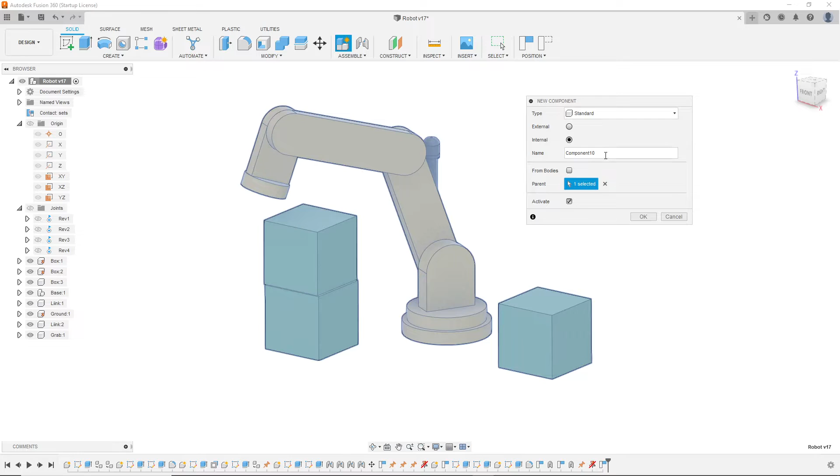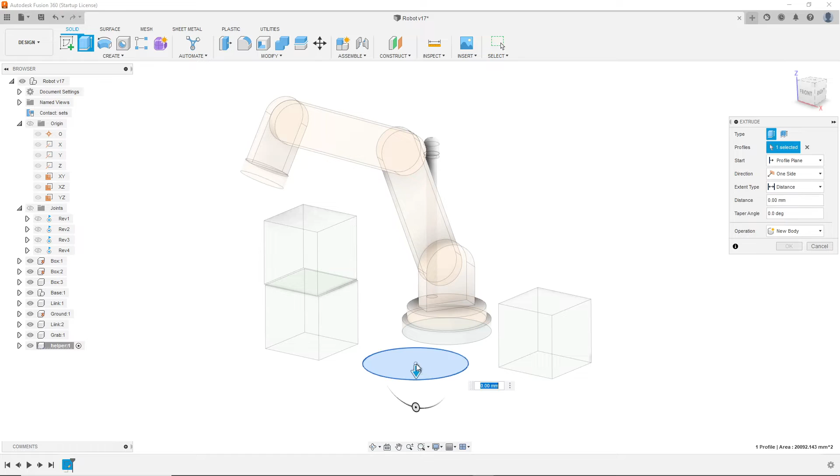So if I right click on the assembly and create a new component, I'll just call this helper, and create a sketch on the base plane. Just draw a circle and we'll extrude that. Okay, so there's our body or component that's been created.

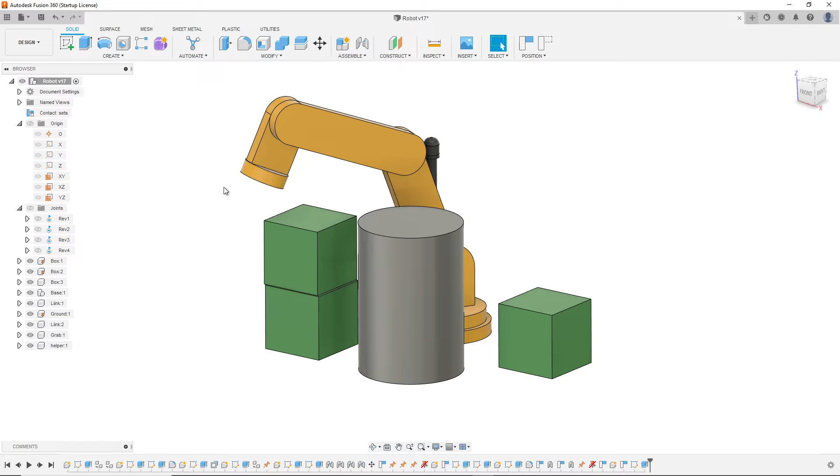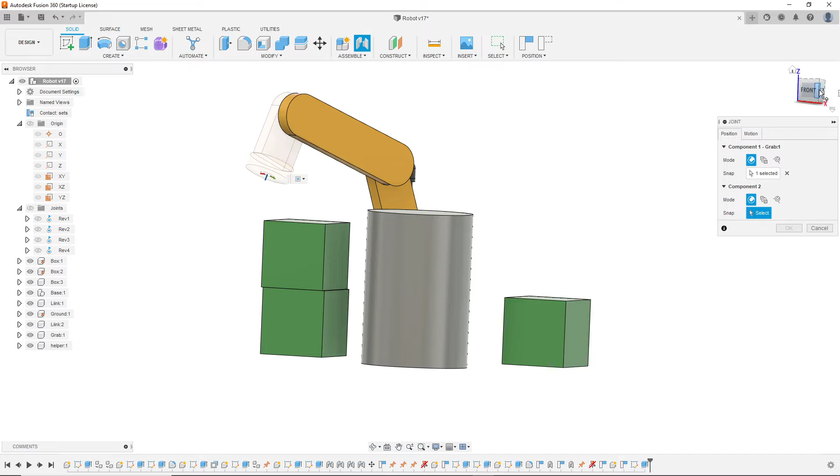If I go back to the assembly, what I can do now is add joints between this helper component and the various components on my assembly to enable me to keep the bottom of this grabber parallel to the ground plane. So if we add a joint, the first joint I want to add is planar, and this is going to be between the bottom of the grabber and the top of the helper solid.

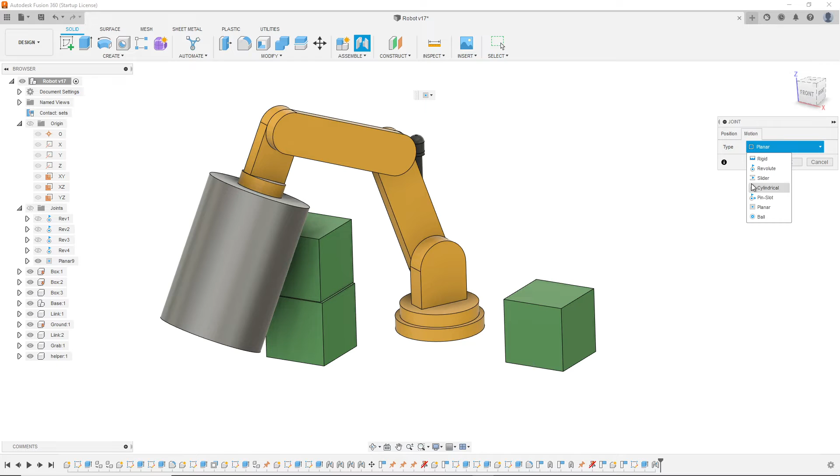Okay, and finally the other joint that we need to add is between the axis of the helper solid component and possibly this grounded disc here would help. So if we go to joints again, this time we'll add a slider joint and add this between the cylinder of the helper component and the cylinder at the base here. And now let's just turn off one of these joints so the assembly works properly.

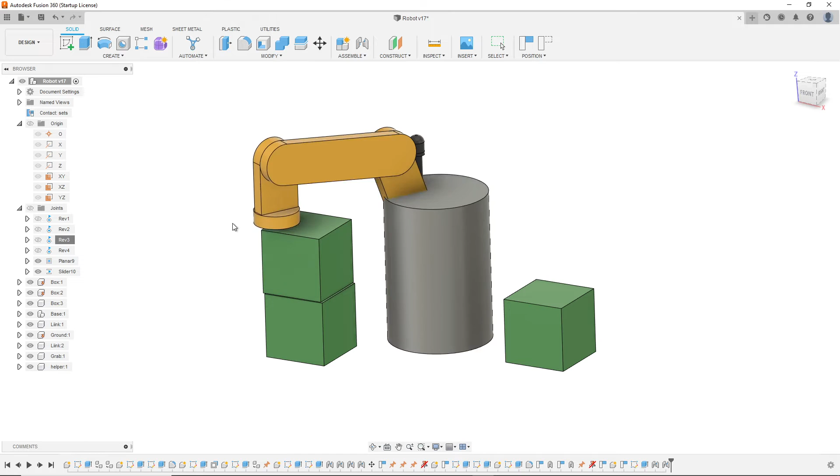So now as we move this arm of the robot up and down, you can see what's happening. That helper solid is now acting according to the joints I've added, and it enables me to move this robot around, but the bottom of the grabber is always parallel to the base plane. Okay, so we can just turn off the visibility of the helper, and that's the robot working as I require it. You can use this technique in other assemblies, obviously. It might be useful in the future for you.

The other thing we've got here is the fact that as I grab these boxes, I don't really want the robot to move through them. So what we can do is use something called contact sets. And with contact sets, we add components that we actually want to make sure don't interfere with each other as they move around. So we've got the grabber on the robot and the three boxes. That's what I want to check for contact between.

So if I click on OK on that, what happens now, as I move this robot arm down, you can see as I get to the box, let's move this box back, it slid off, which is a bit of a byproduct with using contact sets. But as I move this down, you can see it touches, it will not move past this box. If I ground this box, there we are. As I move the robot down, look, you see it won't go any further than the top of that box.